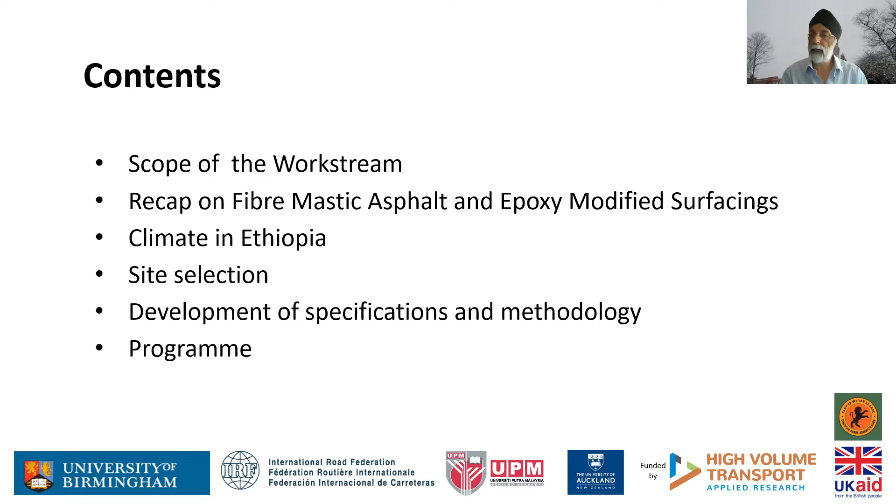So you've heard from Professor Metia that the talk is going to be on new technology surfacing constructability trial, which is part of the CRISPS project. So without further ado, let me push on. Okay, so I'm going to give you a little bit of background about the work stream, i.e. where this work fits into the whole CRISPS project, and then give you a little recap about fibre mastic asphalt and epoxy modified surfacing materials. Both these areas were covered in our previous webinars. And then we will talk a little bit about climate in Ethiopia, site selection, development of specification, methodology, and programme.

So where does this work fit into the CRISPS project? CRISPS has 4 key areas which need to be delivered. The first one is deterioration modelling. This is being undertaken in New Zealand, and there was a webinar on this. They, together with the University of Birmingham and Professor Ratna in Malaysia, will also be dealing with the life cycle modelling. At the university, we have been working on an anti-fraud framework, which is to do with the quality control of the materials used in the epoxy surfacings.

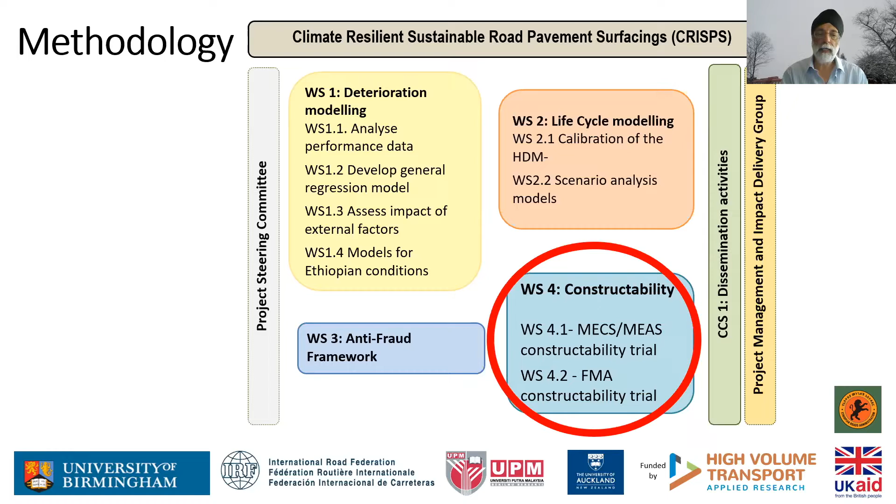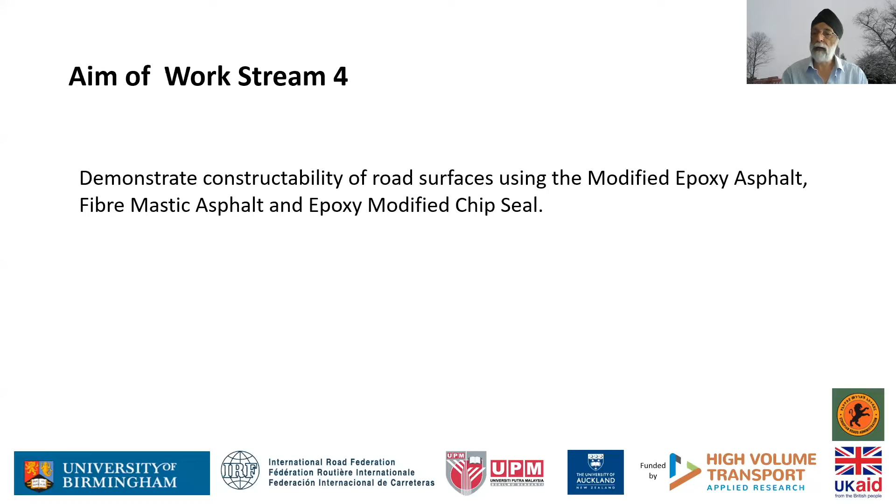And finally, we pull all these things together, and we are to undertake a constructability trial, which is the subject of this webinar. So the key aim of work stream 4 is to demonstrate constructability of road surfacings using modified epoxy asphalt, fibre mastic asphalt, and epoxy modified chip seal materials.

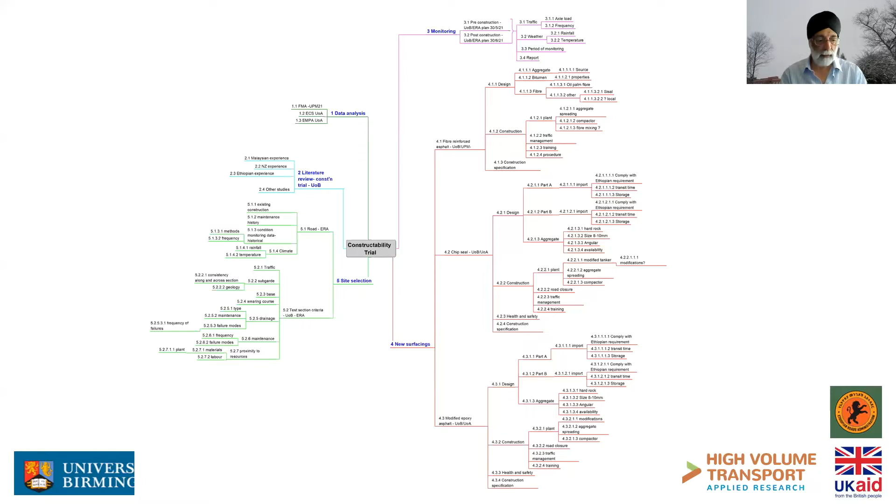So at the beginning of the project, we put together a sort of mind map which pulled together all the things we needed to do. So this looks like a bit of a web, so let me break it down a little further so you can see things clearly. So the first input into the project is actually literature review, and I should say inputs is data analysis.

So we are looking at work that's already been done in Malaysia on FMAs, that's fibre mastic asphalt. And then in terms of modified epoxy asphalt and modified epoxy pavement surfacings, we have input coming in from New Zealand through University of Auckland, where they have been doing extensive work on the subject. We are also looking at information that's in public domain through these studies in both Malaysia, New Zealand, and elsewhere in the world, and any experience Ethiopia has on putting surfacing materials down and elsewhere. So all that literature review goes into feeding the constructability trial.

So the next key area we need to address is selecting the site. So how do we do this? And this is where input from Ethiopia is very, very important, because the trials are being constructed there. We need to use their plant equipment, labor, and other resources. So in terms of selecting the trials, we needed input in terms of what the road condition, what the roads are in Ethiopia, what the climate regimes are, how do they monitor condition of the roads, what sort of maintenance takes place, and what the construction procedures are.

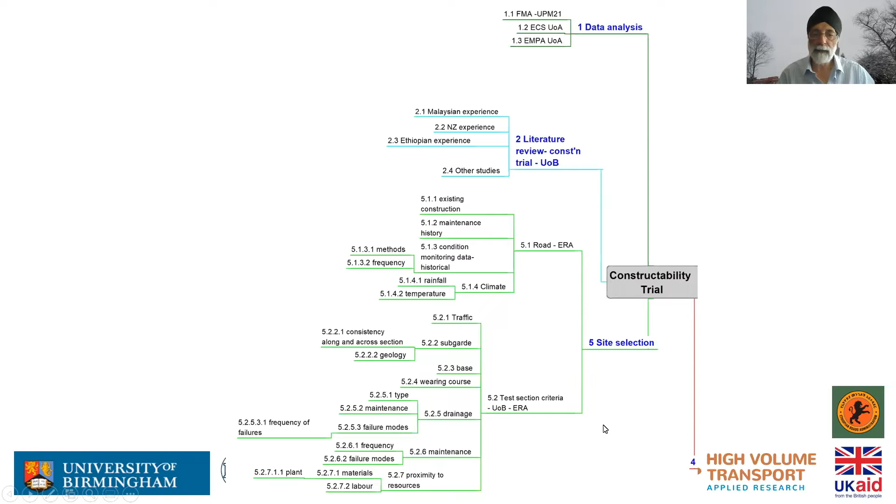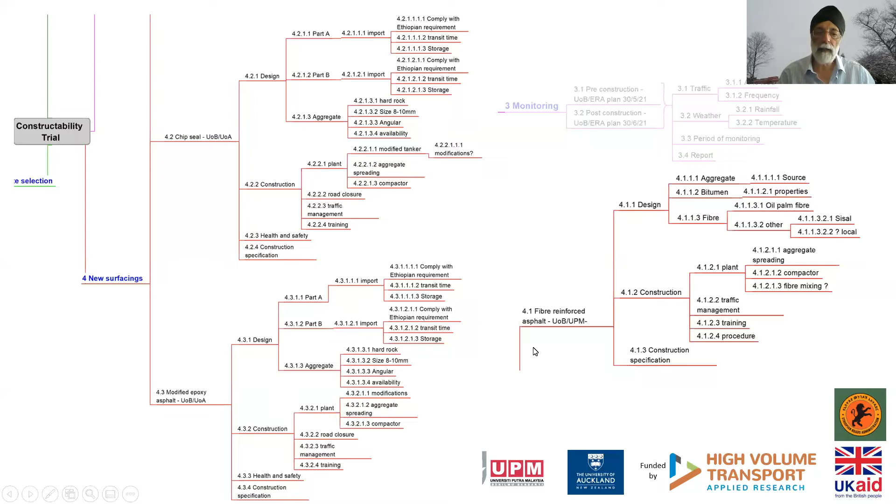We then looked at other areas such as modified epoxy chip seal and epoxy asphalt as part of the new surfacings which we want to put down on roads in Ethiopia. And we needed a whole lot of information about design, construction, health and safety. All these needed to be addressed for the 3 technologies we are pulling together to trial. Last but not the least, we needed to consider monitoring. We need to know about how the roads which we're going to select or are selecting have been monitored, and what sort of monitoring will take place after the roads have been constructed.

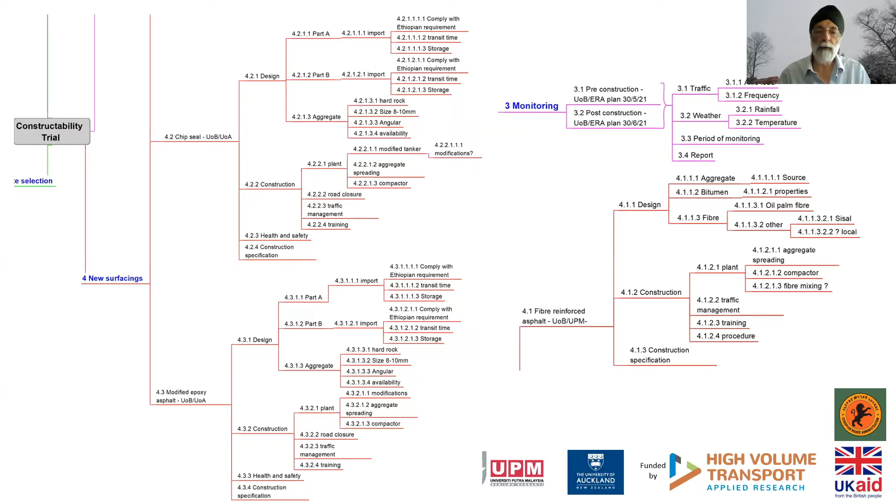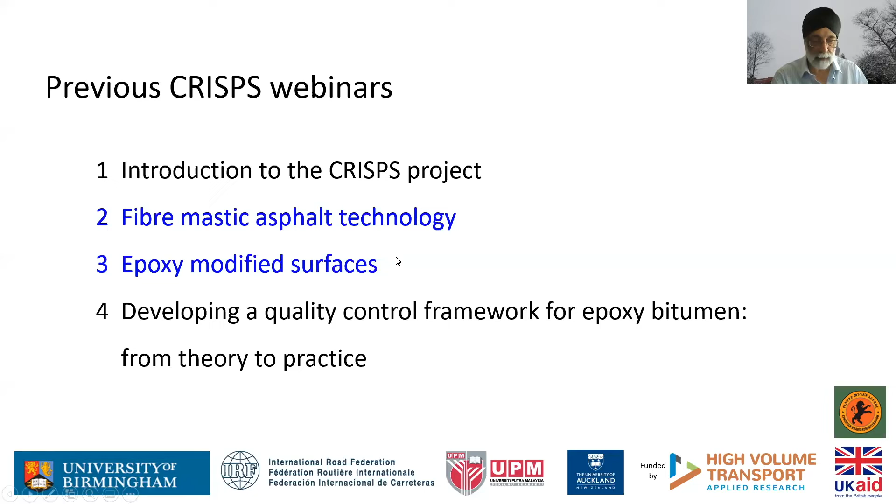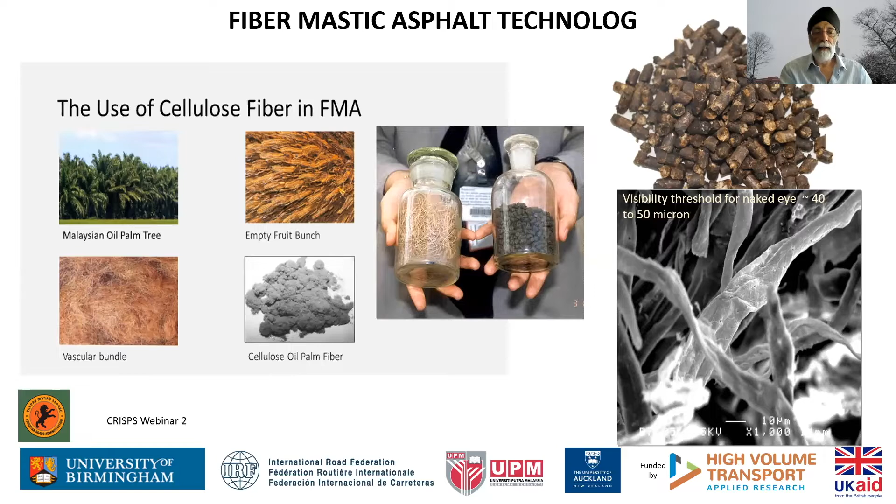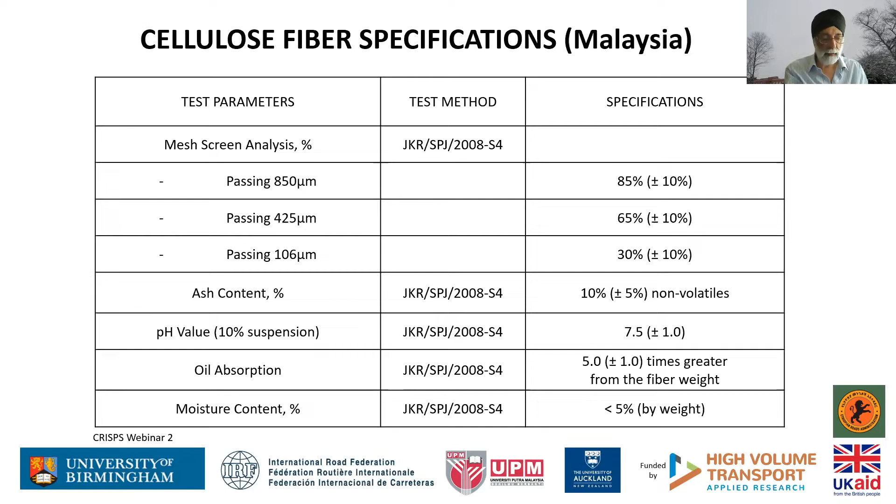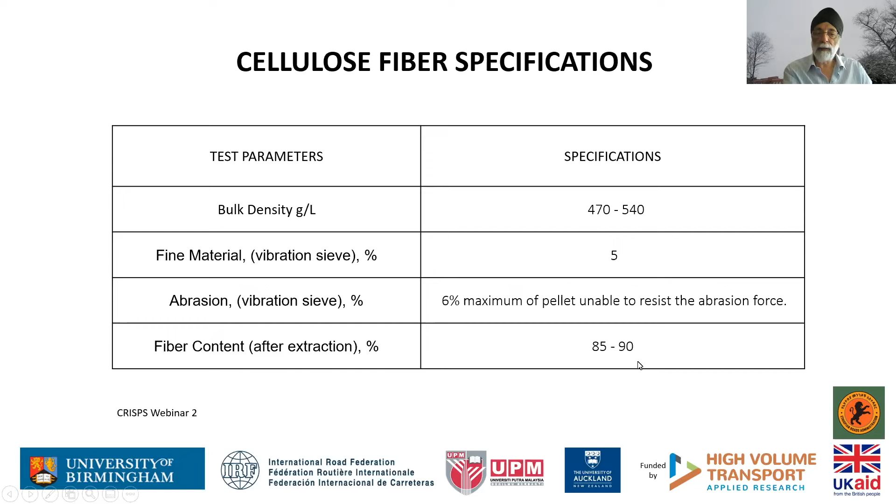And this is an extract from webinar 2, which was specifically on fiber mastic asphalt. And you can see the sort of specification that's being used in Malaysia. So the properties are something like moisture content 5% or less. It's got to be quite a dry material for it to be used. And for road construction, they use material where the pellets have 85 to 90% fiber in it. And they've simply added this to their surfacing, and they've monitored its performance, and you can see that it's given stability improvements over a conventional gap graded material of around 125%, and the resilient modulus durability increases by about 90%.

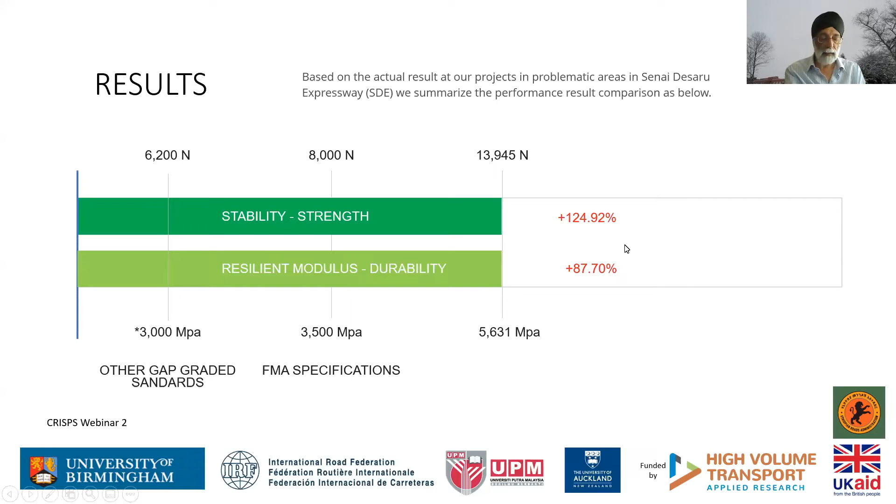All in all, it's proven to be quite a good material, and it's being used on some surfaces in Malaysia. Hence, it's been brought into this project. Now, this is relatively new technology, although they have been working on this for 20 odd years in different forms. But actually putting it in the roads is a very recent thing. So let's move on to epoxy materials.

So why have they been using this in Australia and New Zealand? So this is an extract of a couple of slides from webinar 3. They have found that when they've used epoxy asphalt surfacings, it gives them improvement in terms of resistance to water ingress in the pavement. And also it's resistant to higher temperatures.

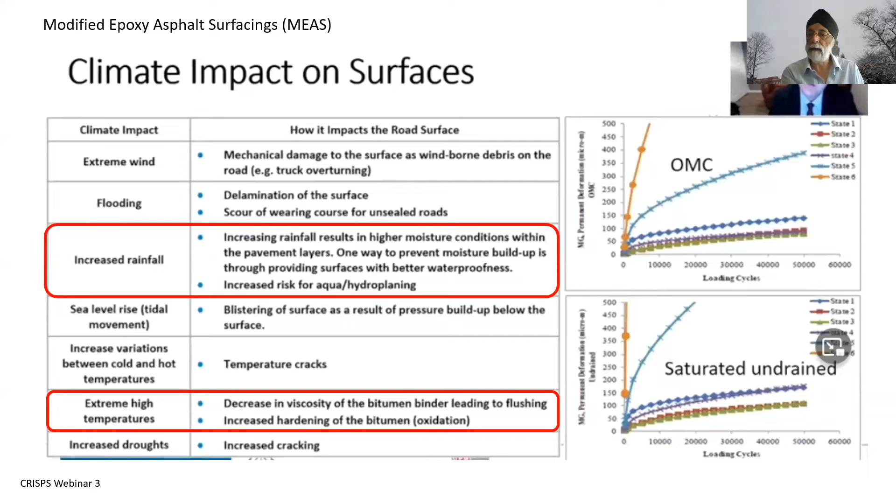Now, we need to remember that this material was developed for airfield applications some 60 years ago, and I'll say more about this later. Let me just do a recap on this first, on why it's being used. And they have actually found improvement in overall performance, which you can see here. Now, the slides for both webinar 2 and 3 are available on the internet, so I expect you can read more about this later on.

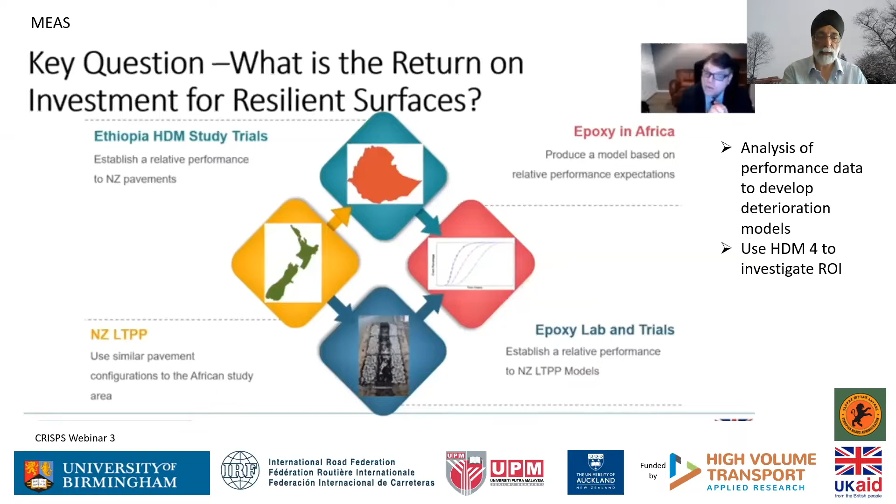Carrying on with webinar 3, they're looking at the deterioration model of these pavement surfacings, as we showed you a little earlier. And so they have been using these surfaces in New Zealand for a few years now. So they have a lot of lab data available, they have field trials available, and this is all being fed into an HDM-4 type of study, which will be used to look at deterioration modeling, and it will input into whole life cycle analysis in terms of costs.

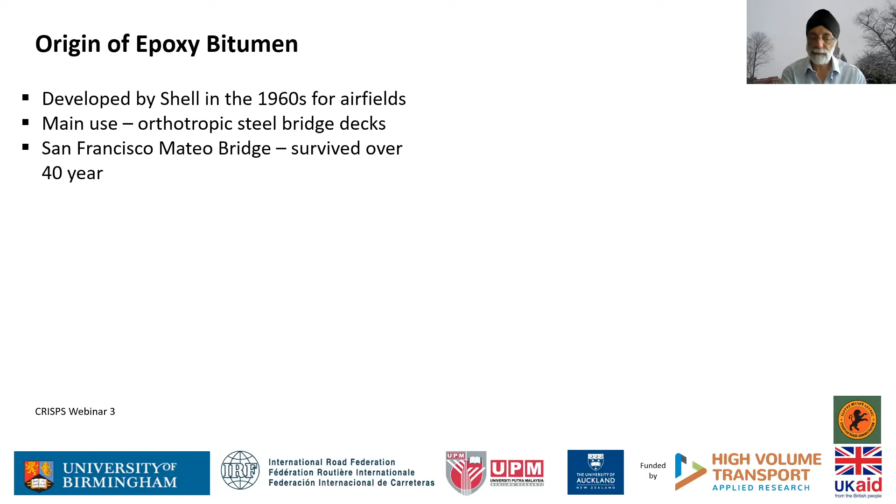So let me just extract a slide which gives us a few words about the origins of this material. It was developed in the 60s for airfields. It was to stop asphalt melting under the effect of jet engines. And it was quite successful. And then after that, it was used as a bridge deck surfacing, and it has been proved very successful, and in some cases lasted over 40 years without any issues. And hence, people are beginning to look at it in terms of applications for roads.

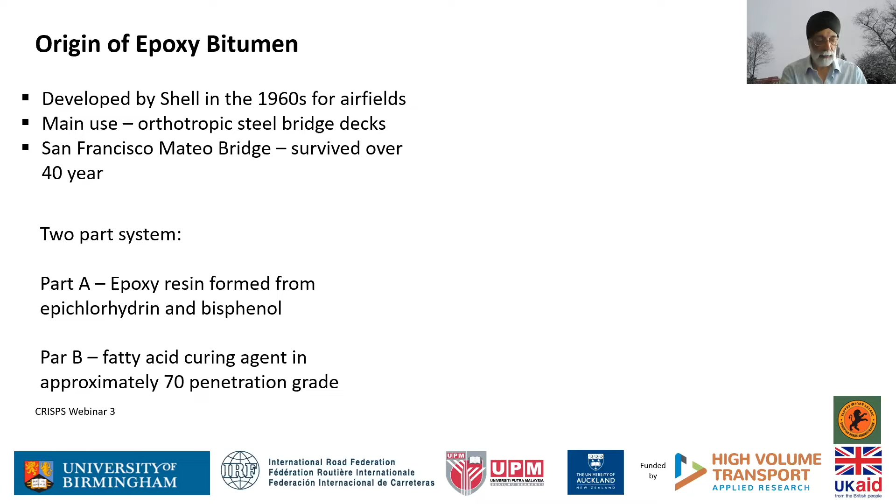So epoxy material is a two-part mix of two components. Part A is an epoxy resin formed from epichlorohydrin and bisphenol. And part B is a fatty acid, which is added to 70-grade bitumen. So for this project, we are using part A, which is common to both the epoxy asphalt surfacing and the chip seal material. There is, however, variation in part B.

And for the asphalt surfacing, we are using a mix which consists of 85.4% part B and 14.6% part A. For the chip seal, there's a different concoction of part B, and the proportions are slightly different.

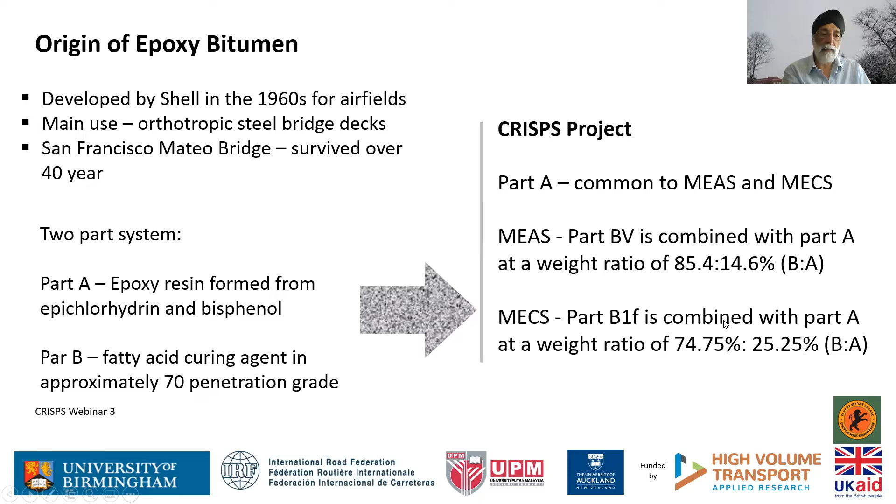Okay, so why the attraction? Well, the work done in New Zealand, as demonstrated by David Alabaster in webinar 3, through his work with OECD on long life surfacing materials for pavements, showed that it was stiffer at service temperature with greater load spreading ability, more resistant to rutting and low temperature cracking initiation, which will help with durability clearly.

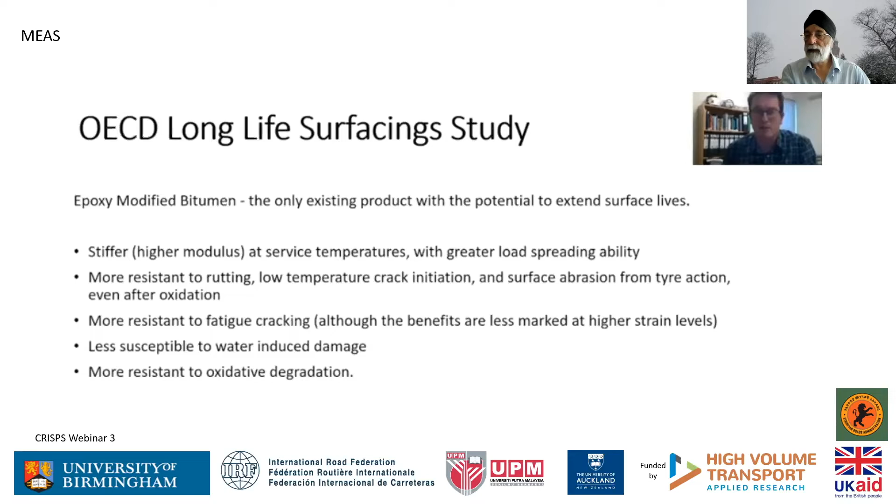Better resistance to surface abrasion from tire action, even after oxidation, so it helps again with durability. It's more resistant to fatigue cracking, less susceptible to water-induced damage, and resistant to oxidation. Essentially, these items are covered in that statement there. So that's the key attraction.

So what have they been doing under the OECD work and later? So here are some more slides showing that. They've done a lot of lab work. They've done large-scale trials, small-scale trials where they've done work manually on localized small areas, which I'll mention in a short time. And then they have modified their asphalt batching plants by adding another facility for adding part A into the mix.

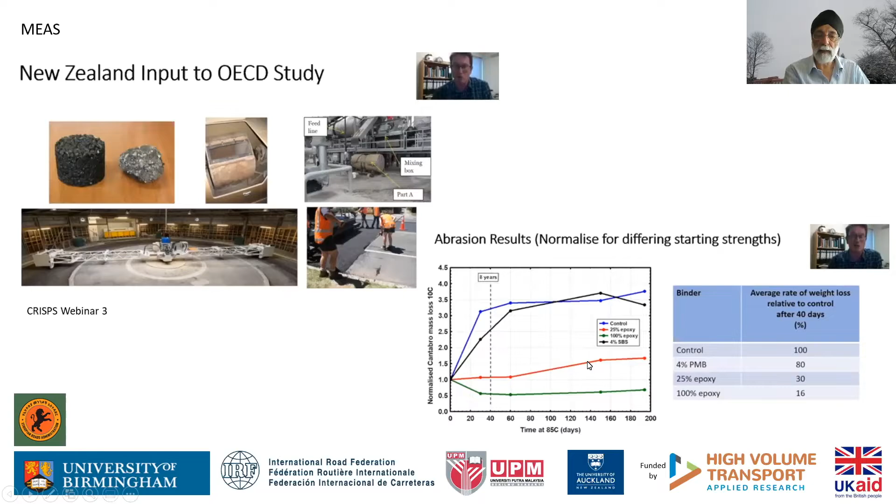And here is just one of the slides showing the improvement. This is about loss of material, and these are conventional materials. One of them is with SBS. You can see there is quite a bit of loss here compared to materials with even 25% epoxy. Shows you quite a lot of improvement in performance.

Okay, so here is the small scale work and the large scale work. So let me talk about the chip seal work they've done on a small scale. They've manually mixed the materials in areas of around 10 square meters. So they manually sprayed the two components and put the chip seals on and then trafficked them. There's more reported on this in webinar 3. And it showed to be quite successful.

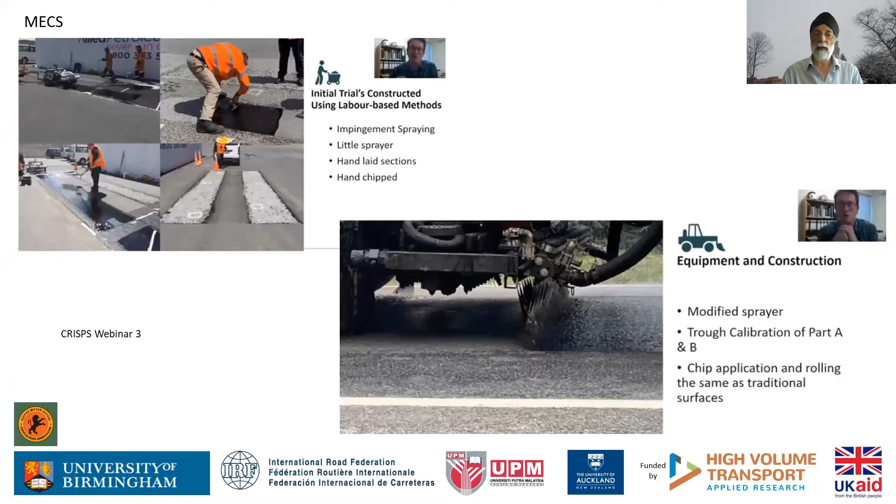And then they moved to the larger surfacing work where there was impingement. There was a second spray bar added to the conventional sprayer. So the two components, part B and part A, impinge from each other's outlets. So the two components mix just before they hit the road surface, and the chips are then spread. And this also proved to be quite successful, and they've been using it successfully in New Zealand.

Okay, in terms of overall performance, you can see here, this is some data from over 10 years worth of work, again from New Zealand, and you can see there's much loss of material with conventional bitumens, and these two are with epoxy materials. And you can see whatever type of epoxy we're using here, it's showing much better improvement compared to conventional.

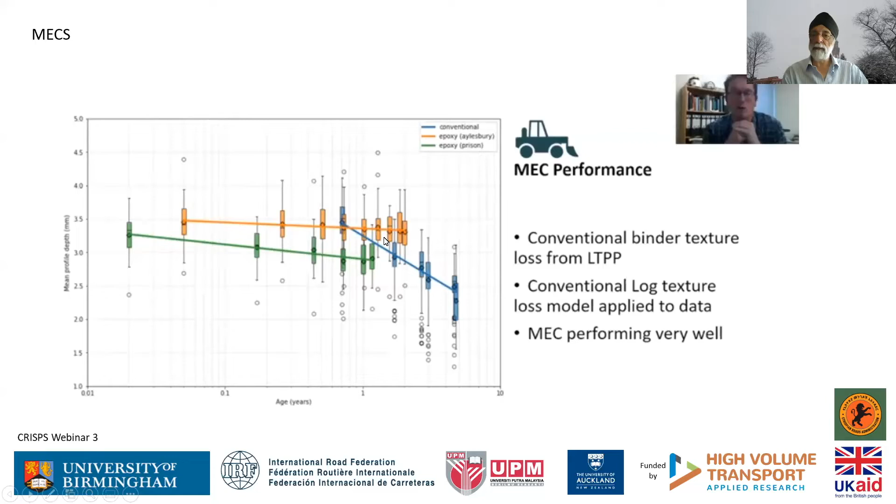So let's move on to work in Ethiopia. So the first call was to put together a site selection criteria. And this is a 4 or 5 page document. And this is just an extract for me to show you the site selection information that was required to select the site. So here we wanted to know about local geology, materials that were used in construction, planned to be used according to the standards and what was there.

So we needed to know things like CBR, moisture content, strength, all the usual things. We also needed to know about traffic loading, what sort of maintenance procedures are in place, how often the surfaces are maintained, and so on. Key here was also drainage condition. We needed to know how good the drainage was and how that was maintained.

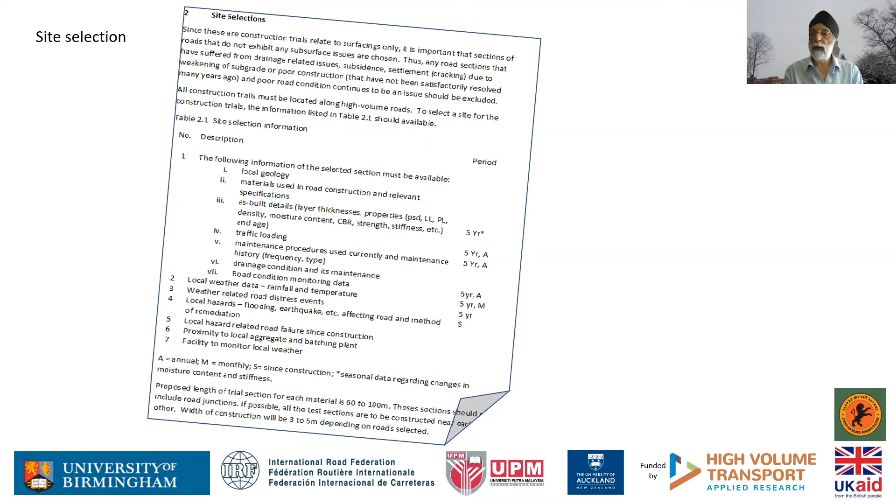And finally, we needed to know about road condition and how that information was monitored and how the data was dealt with. And there are a few other things about collecting weather data, local hazards, earthquakes, and so on, which were quite pertinent.

And the second trial surface is, oops, Daisy, let me go back to stage.

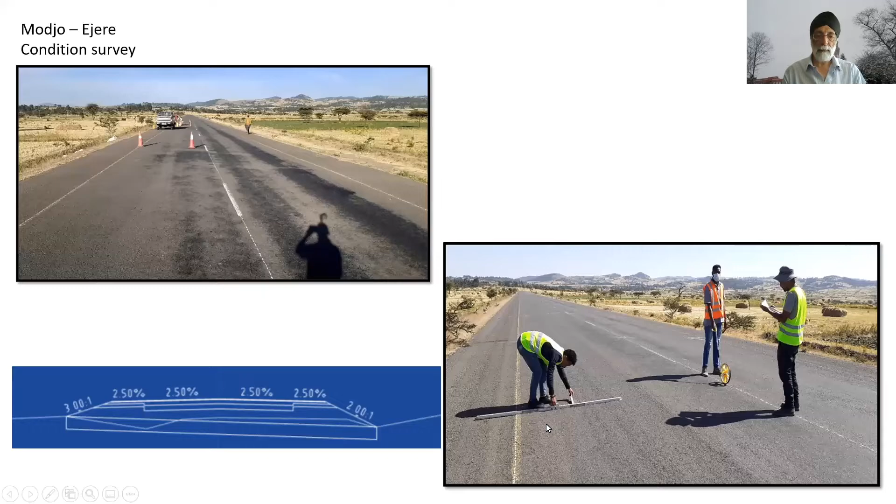Okay, this is the Modjo – Ejere Road. Clearly, we picked a very nice, quiet day when we were doing this condition survey. And here the width is about 1.5 meters, but in sections we have selected, in fact, in most of the road, the shoulder is only a gravel surface, but it's 7 meters, and the structure is more robust. It's a trunk road carrying heavy traffic along. And as you can see here, this condition is quite good.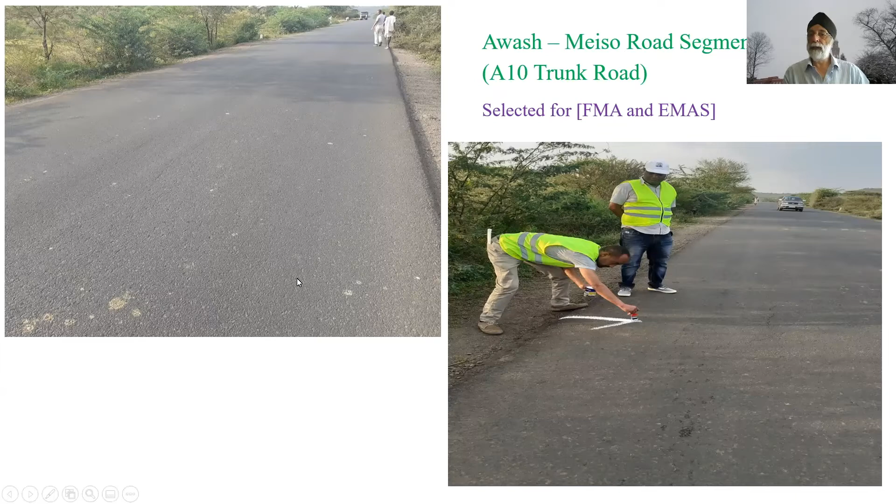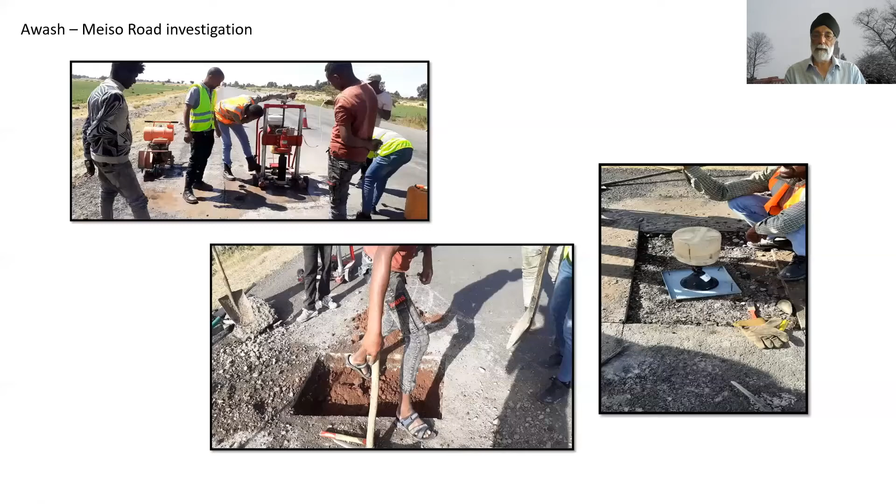Where we needed some information, we have undertaken field work, so you can see some trial pits being undertaken and some coring to measure thickness in the road. Now I'll say more about why we needed to do this work. And okay, so details. We narrowed the list down to about 3 or 4 road sections with up to 4 sections for the trials on each, and then we honed in on the roads I mentioned. So let me just move this out of the way.

This is the information that was available, and here after our surveys we've selected the sections. So you can see here we've chosen 100-meter sections. One of them will be for the trial construction, and the second one is the surface. Now I should mention that both these roads are part of an Ethiopian Roads Authority surfacing contract. So they are already going to be surfaced, and sections of the road will be selected for our trial.

So that's the section. So we've now honed in on finding out what the condition of the road is, and you see the information. Overall, it's looking good. No maintenance undertaken except routine. And the dark, expansive clay subsoil is present, and we have the geological description of materials here and some additional material information here.

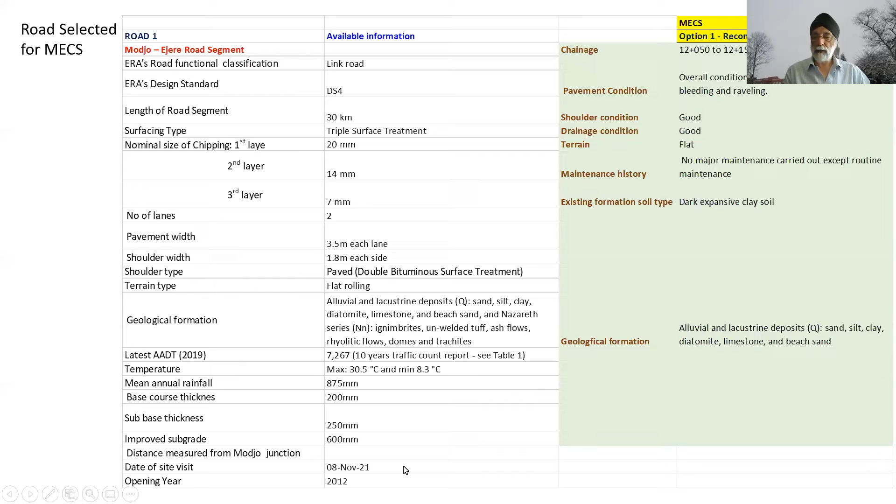And we've extracted general information about rainfall, thicknesses of base courses, and so on. Now, this road was opened in 2012, so there's a lot of information available about the pavement structure and layout of the road. As opposed to the Awash Meiso road segment, which was constructed and opened to traffic in 2013, or last redone in 2003, I should say. And so there is little information available about certain aspects.

So hence this red font here, because this information was missing when we first did the tentative selection of the site. Subsequent to that, we have done another site visit, undertaken laboratory tests, and we have ascertained all this information. This bit about annual rainfall, we have information about the rainfall. I just haven't updated my chart here, and I'll talk about the information in a second.

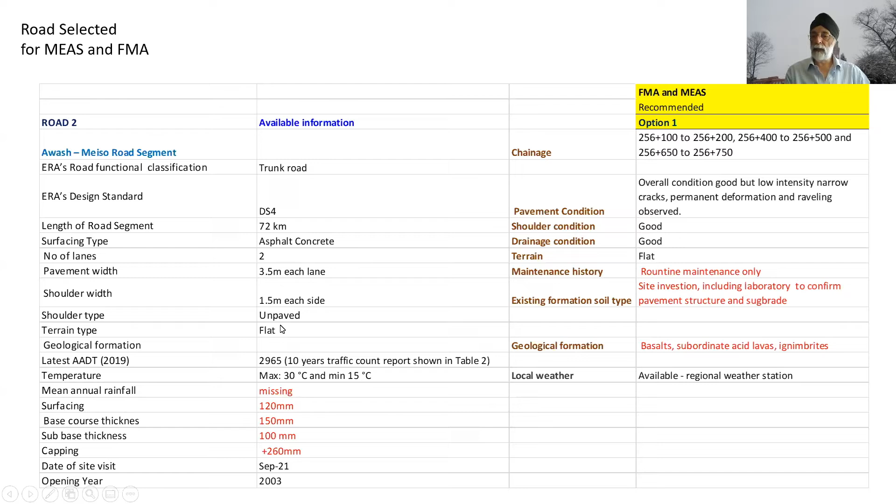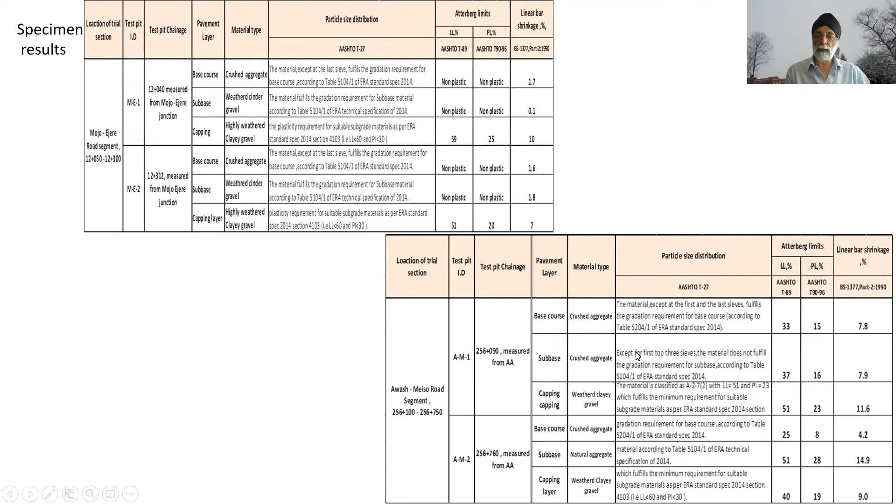So there is routine maintenance, site investigation was undertaken to get the information and so on. And here we see the information about lane width. It's a 2-lane road. The shoulders are unpaved and the terrain is relatively flat all the way across. So test results, I've just extracted here some specimen data to show you the sort of things we have measured along the road. So properties of materials that are being used in roads for both the Awash Meiso Road and the Mojo Ejere Road. And you can see here a different spelling is being used in this file.

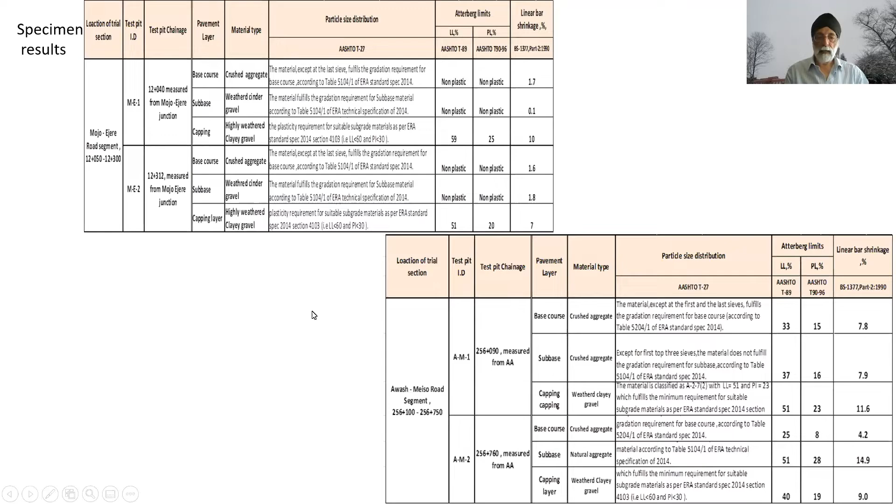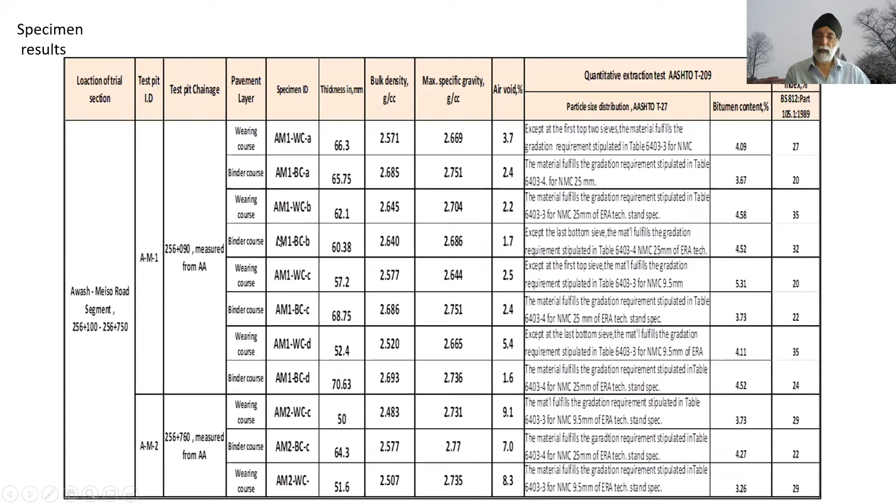Okay, some more data about the Awash Meiso. This is the road section. If you remember, I mentioned that there was little information available about properties and some other aspects of the road. So some specimen lab data is here. There's a lot more about particle size distribution, about the properties of subgrade soils and so on. Okay, so let's move on swiftly to what we are planning to do.

So for asphalt surfacing, that's FMA and MEAS, which is modified epoxy asphalt surfacing, we are planning to put a tack coat and then put the additional surfacing on top of the road. Now, the planned work for this road section for the new contract ERA is having in place, they are planning exactly the same. So this will be a conventional asphalt surfacing for most of the road. For our sections, we'll use FMA and MEAS. And this is the standard tack coat which they're going to apply. So we'll be comparing this with the standard material they will put down as part of their contract.

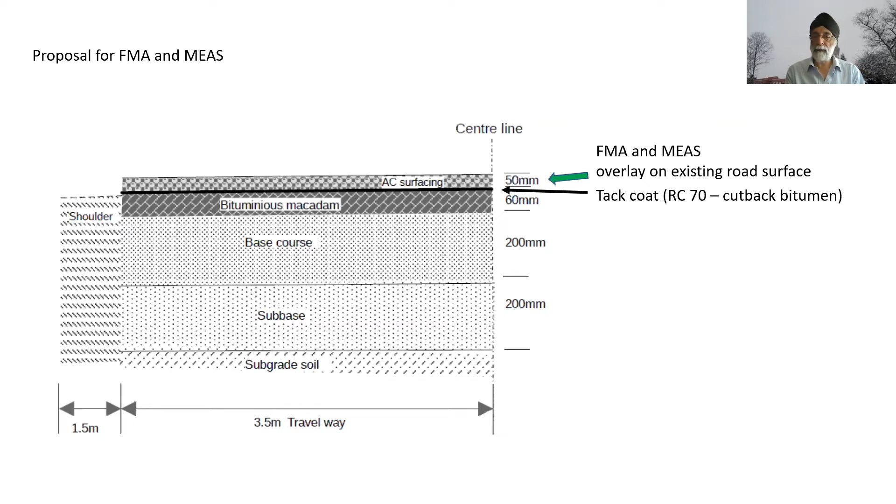And I should just go back. In terms of chip seal, we are going to do the same. And instead of putting the asphalt surfacing, all we're going to do there is put a chip sealed surface, which is also planned for the Mojo Ejere Road, and we'll be comparing almost like for like. The only difference will be material.

Okay, so FMA. There was a webinar on FMA, which we talked about. We have prepared draft procedures for the plant construction modifications. There are some areas which need confirming, and I'll talk about that in a second when we go through here. And the current position is FMA material is in road research laboratories. The key issue we are discussing with ERA at the moment is modifications required to plant.

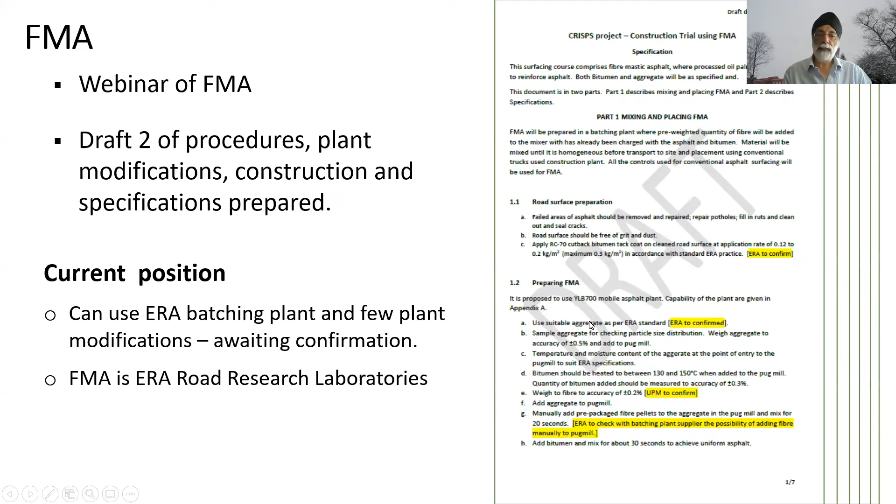In simple terms, all we need to do is add the fiber to the batching plant. All the other procedures are essentially the same. We're using the bitumen as per their existing standard. We're not changing any of that. The aggregate, nothing will change. All we're doing is adding the FMA. And so we've drawn up the procedure for this, and we have specification, particle size distribution, everything is there.

Now, still carrying on with the FMA. So this is the easiest material to put down as we see it, because very little modification is required, very little new learning is required for the team in Ethiopia, for the contractor's team and the construction team. We simply need to make sure that the plant is going to operate properly and the temperatures can be controlled to within the required parameters. And we don't see an issue there, but we still need that confirmation from Ethiopia.

Now, let me just add, as it is part of the existing contract work Ethiopia is planning to do in any case, they are going to use a plant, which we will talk about in a minute, and the plant experts need to make input into the project.

And so we are communicating with them at this moment to finalize that bit.

Okay, so modified epoxy asphalt surfacings. We've opted for denser asphalt. Most of the work around the world has been done on open graded asphalt surfacing. We're opting for this because there is no experience in Ethiopia of using open graded asphalt. Remember, this is a constructability trial.

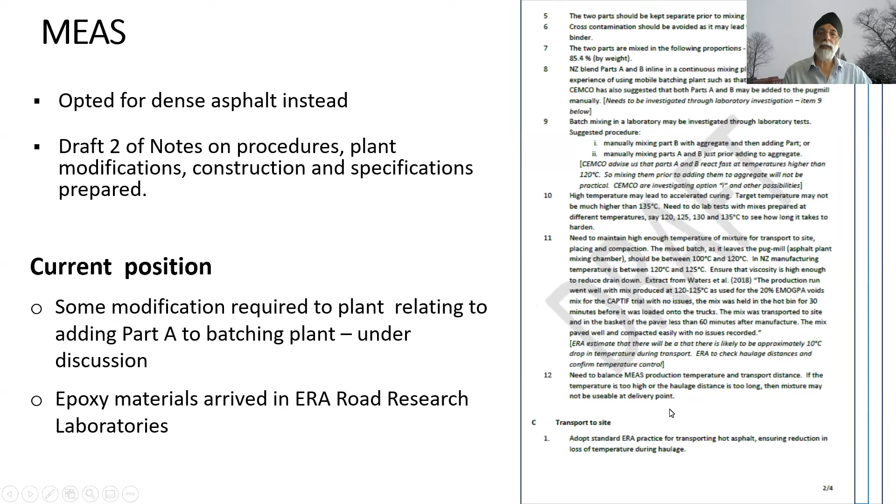Okay, so on the right-hand side, we have information about the road surfacing, what needs to be done, about batching the asphalt material. You can see there's a whole lot of material we have put together on this. Okay, and let's move on to the next bit.

So the plant they require is a mobile batching plant, which needs to be brought to the site which they're going to use for surfacing the whole of the Awash Mesa road surface. And this plant has a capability of 60 tons per hour. Maximum batch capacity is about 700 kilos.

Now the challenge we face here is adding part A into the plant. Part B will go through the conventional routine where we put the bitumen into the mix, and then part A has to be inserted into the stream through a premix connection into the injectors for part B or bitumen, or it'll be added separately. And that's the discussion that's going on at the moment.

And we are waiting for the plant experts. There are people available in Ethiopia, and we're expecting an expert from China to arrive there at any time. And once that's sorted, then it's all systems go. The rest of the procedure is pretty much conventional. The other key thing we need to address here is the temperature. The plant is capable of around 130 to 165 degrees temperature control.

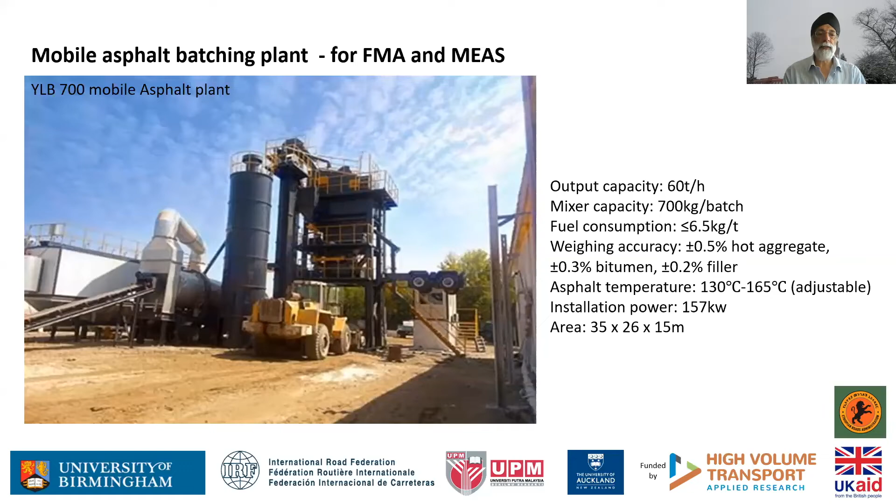If there are hotspots in here, we can have a homopolymerization reaction taking place, and the material will simply go hard; in other words, it'll start to set. And those are the sort of fine details we're trying to get to grips with at the moment.

Okay, in terms of chip seals, we've had discussions with experts in the area, John Bors from CEMCO and Jeff Waters from New Zealand. I should just add at this stage, in putting together the specification and procedures for the asphalt, John Bors and Jeff Waters have also been key to preparing the documents. We've had a lot of very, very useful input from them.

John Bors's company is supplying the asphalt, the epoxy materials, and Jeff Waters is a consultant at the moment working in Ethiopia.

He specializes in road surfacing, and both these gentlemen have been key to the work we are planning to undertake in Ethiopia. The other name I should mention who's made significant input is David Alabaster from New Zealand Transport Agency. He has also made input into the work because he's been key, together with Jeff Waters, in application of both the asphalt surfacing and chip seal material in New Zealand.

Okay, so draft notes are prepared. Again, there are a few issues that need to be addressed. They relate particularly to the spraying aspect of chip sealing. We have the material in Ethiopia. In fact, the material has actually arrived in Djibouti. It only arrived a week ago. And they are now beginning to do some work in the laboratories to get to grips with how this material behaves, and then we're away.

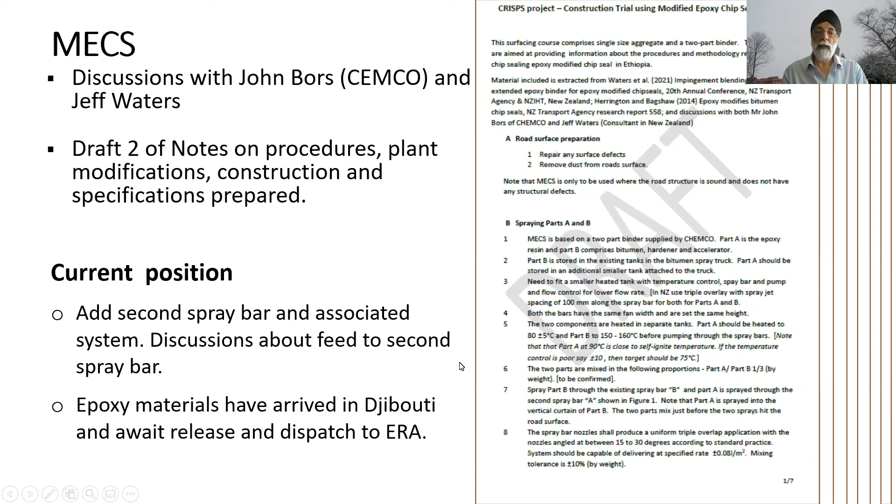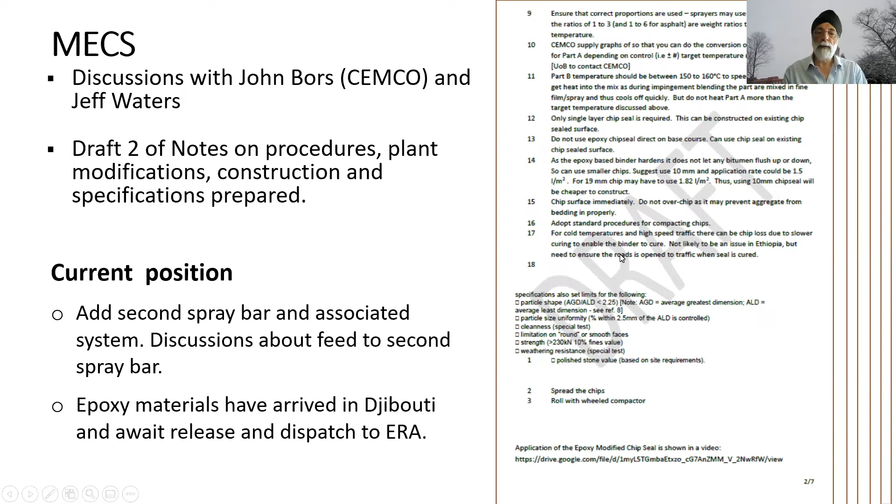So discussions are centered around how we feed the second component into the spray bar, an image I showed you earlier. And there are many discussions, and I'll go through that. So this is what the specification looks like, all the procedures about how we're going to put the material down, the sort of chip seals we're going to adopt, chip materials we're going to adopt, how the roads are going to be open, what the desirable layout of the plant is, and so on.

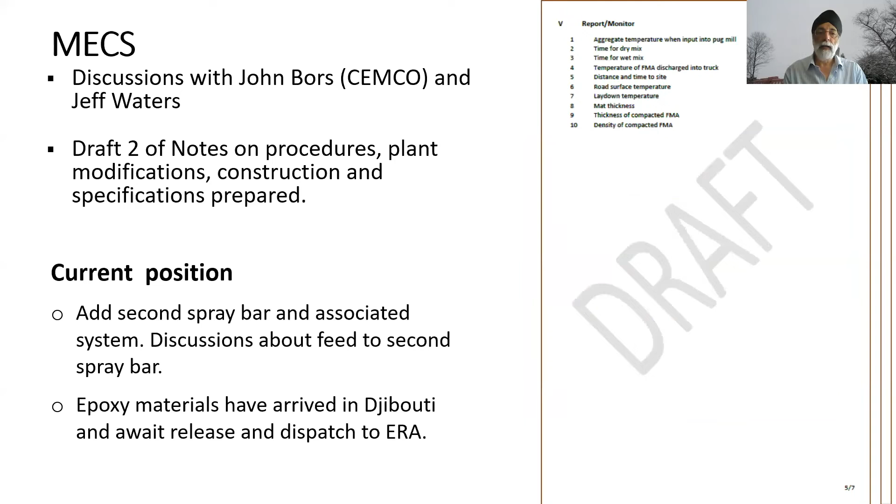The key issue is about the second tank. How do we add this? Because it's not just adding the tank, we also need to add the second spray control unit, pump, monitoring unit, and so on. So we put the material down in exactly the right proportion. There is a little bit of slack in mixing the two, but we want to make sure we hit the target and we don't go too far out of the specification in terms of the ratios in which the materials are mixed.

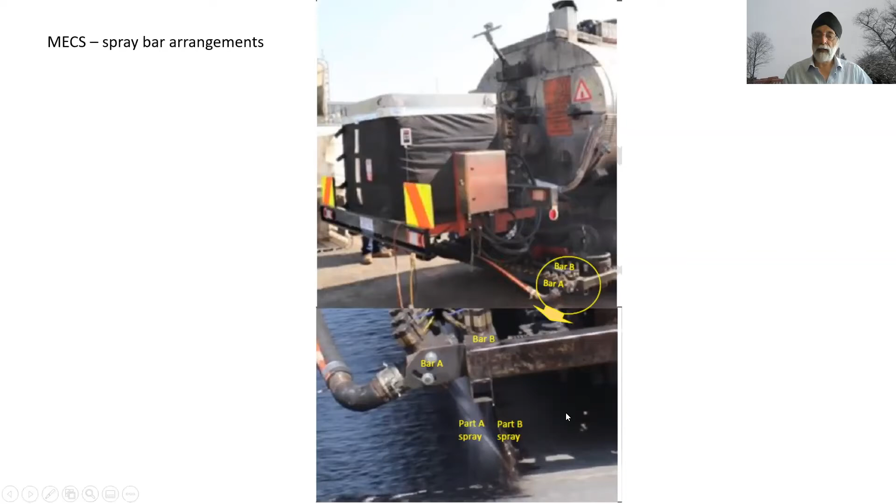So one option was to add another tank as in this unit here. The second one was to tow the second smaller tank behind the first one, or tow it separately. So the first option we are considering is where we put the second smaller unit behind, we tow that from the spray tank, which means both are traveling at the same speed. And ERA has this smaller unit. It's a case of how we attach it to this. So that simply tows behind it.

The issue here is what happens to the epoxy material sprayed from part B when part A runs on it, because it's going to create two areas of weakness along the tire tracks of the trailer. So we considered this option as well, where the part A trailer is running parallel to part B. And the favored option is this, where the part A trailer is running ahead of part B. So whatever comes out of the spray bar, nothing runs on it except chip seal surfacing. And once that's been put on, we can open the roads to traffic. So this is what we are running with.

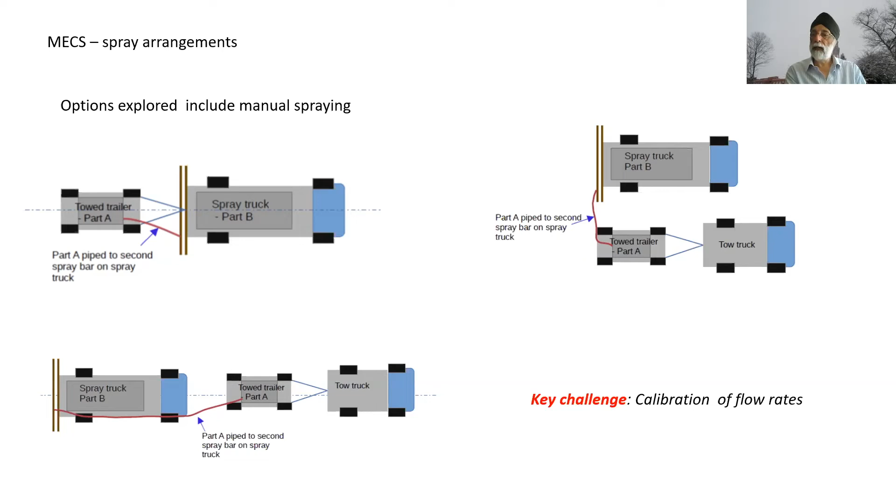ERA is going to attach a second spray bar to their existing spray truck, and so there should be no issues there. The key issue we have to address is calibration of flow rates, which is standard procedure for ERA and others who use chip seal spraying. So that should be no issue there, but we still need to make sure everything is done and the quality control measures are not compromised in any way. So that's where we are at the moment.

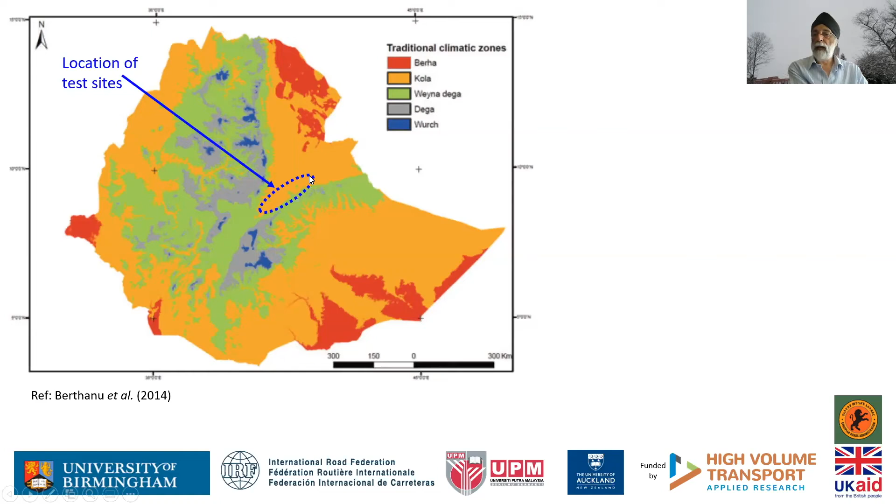So what are these sites? We indicated on the map earlier approximately where they were. So where are they in terms of climatic zones? This is an extract from Berthanu's work on water resources in Ethiopia, and he's indicated classic traditional climate zones, and there are 5 of them, and our road sits in the Kola zone. So the Kola zone is described as warm semi-arid. The key things for us are rainfall and length of the growing period.

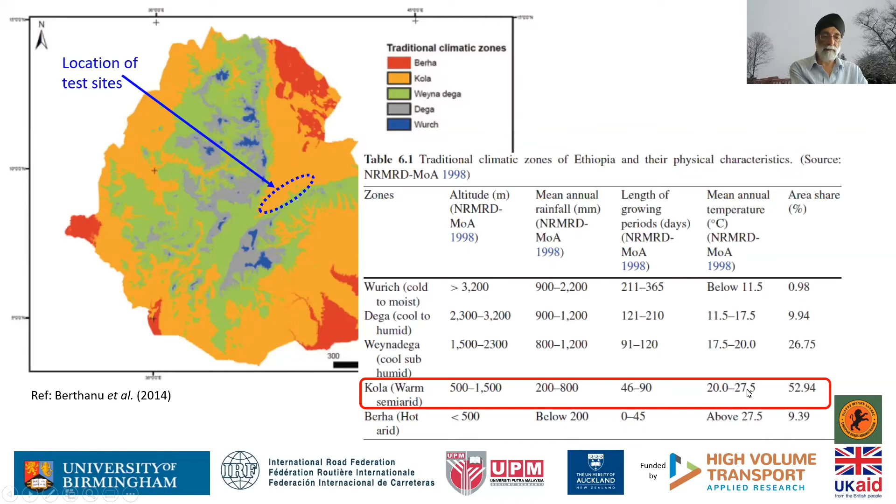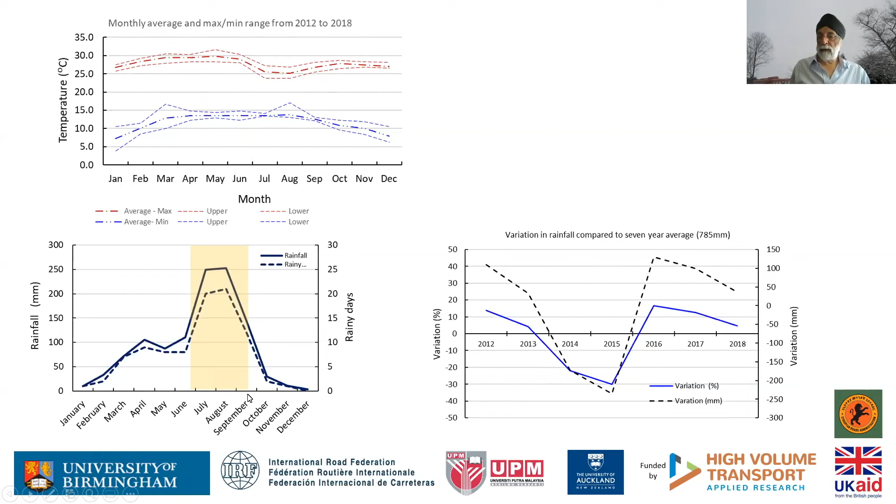Now, in terms of the program, we've scheduled our work to fit in with this rainfall season, and that's what we're going to talk about next. This is a planned program of the work. The contract ends in December. This is the rainfall season, and we were initially planning to finish the work in about May, but the project has been delayed. And one of the key reasons for the delay was actually getting materials into Ethiopia.

There was a lot of red tape, and the red tape was running in parallel with COVID, because it was very difficult to ship materials into Ethiopia during the COVID period. However, we have the materials in Ethiopia now, and everything we plan to do after that has to be done now before the project ends.

So the epoxies with the red hatching are the key deliverables, and we have modifications to plant for all the three identified here. And during the rainy season, when we are not able to go in the field, we will be undertaking laboratory testing, modifying the plant, because the plant will be modified and reset up, certainly for the epoxy materials, during the season. And once it's in place, we can do the construction.

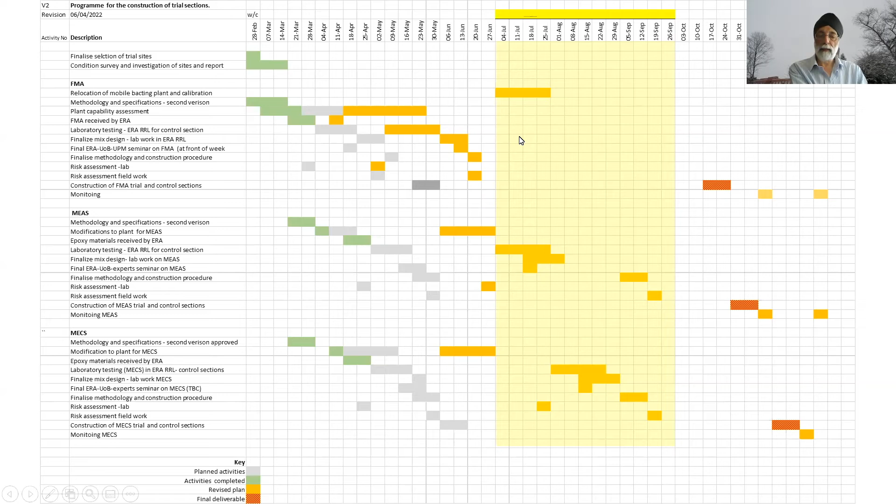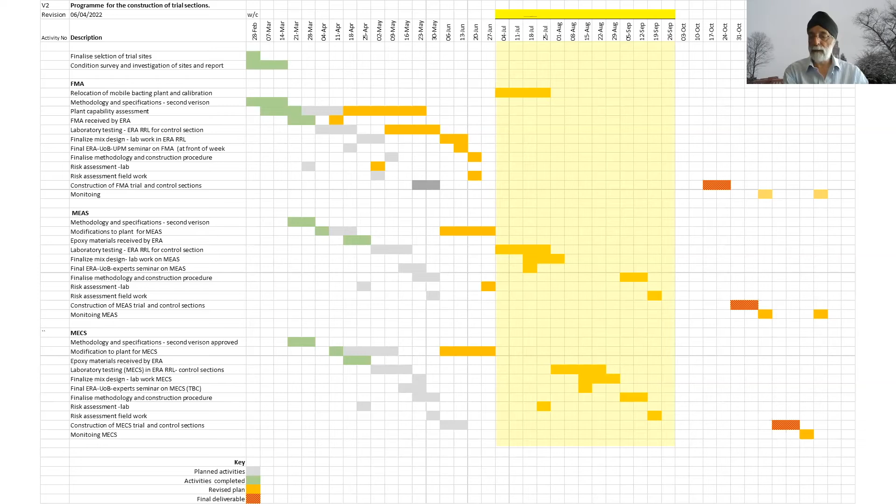FMA work is pretty much in hand. That won't be very much needed. We simply needed the materials in Ethiopia to be able to put things together. So all in all, the real work is now beginning in Ethiopia, and we hope to hit the target with the construction. We are working on the basis that there is no slack in the system at the moment, and everybody's doing their utmost to make sure that things are done and we make the delivery for the project. Okay, with that, I need to stop.

Before I do that, I need to acknowledge the input from John Bores, Jeff Waters, and David Alabaster, who have been key in helping us put together the methodology and other aspects of the field trial. They're also helping us with health and safety work. We see that as key to the project. And of course, they're also helping us with the quality control work that needs to be done in parallel with the other aspects which we've discussed.